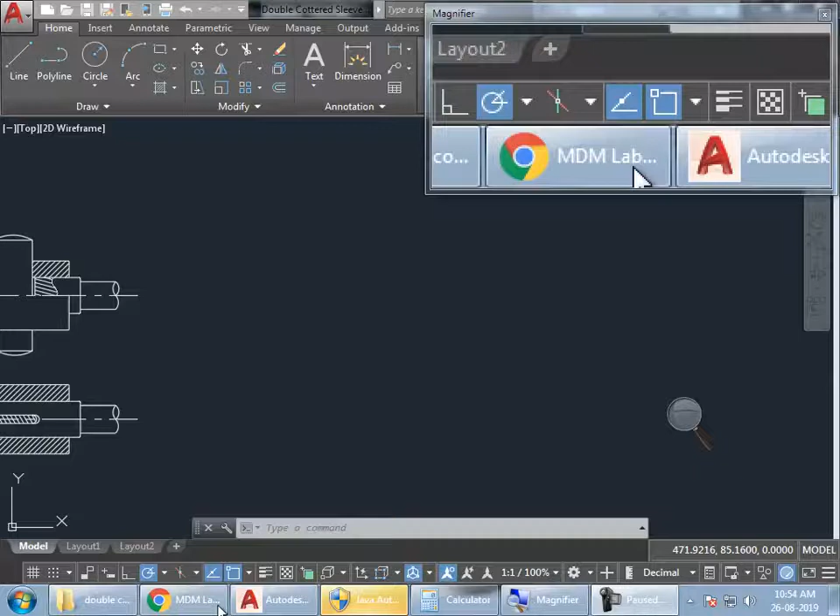Okay, now watch here. Next, everyone watch here. Stop drawing. So next we are going for cottered joint with socket and spigot. Fine. So I have placed a magnifier here. So wherever I am moving my mouse, you can see the magnified view over here.

Okay. So what is the name of this? Cottered joint with socket spigot ends. Again, all the dimensions have been given here. First thing, you have to calculate all these values. Keep it ready. Okay. You should be able to draw a rough sketch of this. Once you have the rough sketch along with all the values, we can start drawing. Fine.

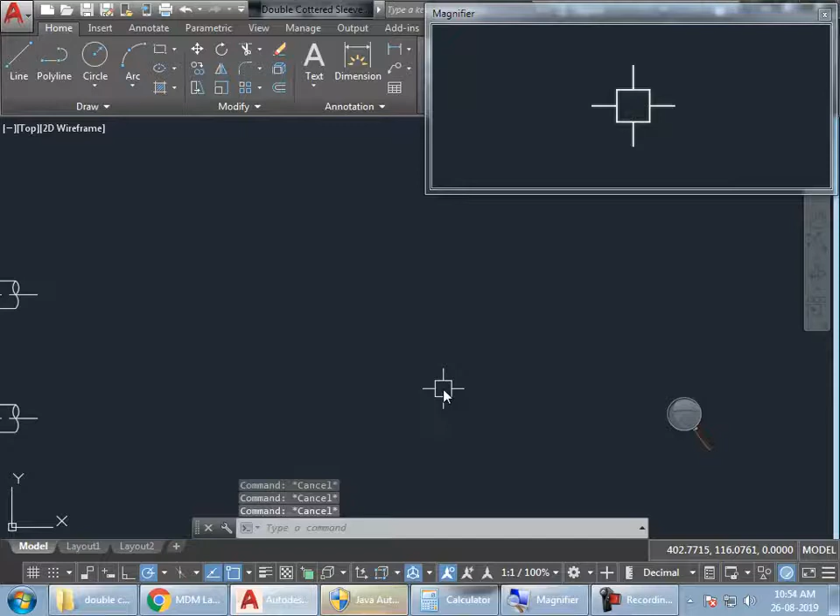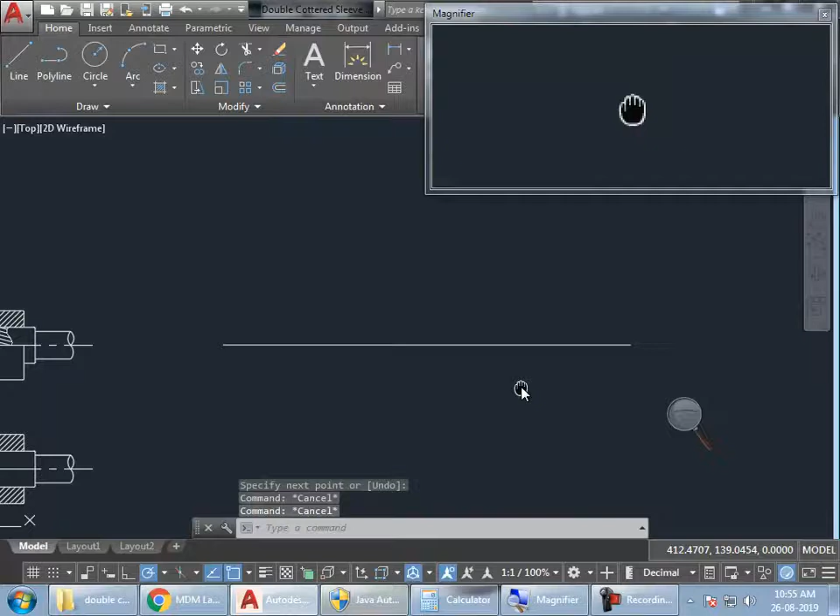So I'll first start at the center. So I have to start with the center line, right? Now, what is the diameter D? How much did I give the diameter? 16. So you can see on the whiteboard, I have told you the value of D is 16. So 16 means how much on both sides? 8 on both sides. So 8 above and 8 below. Clear?

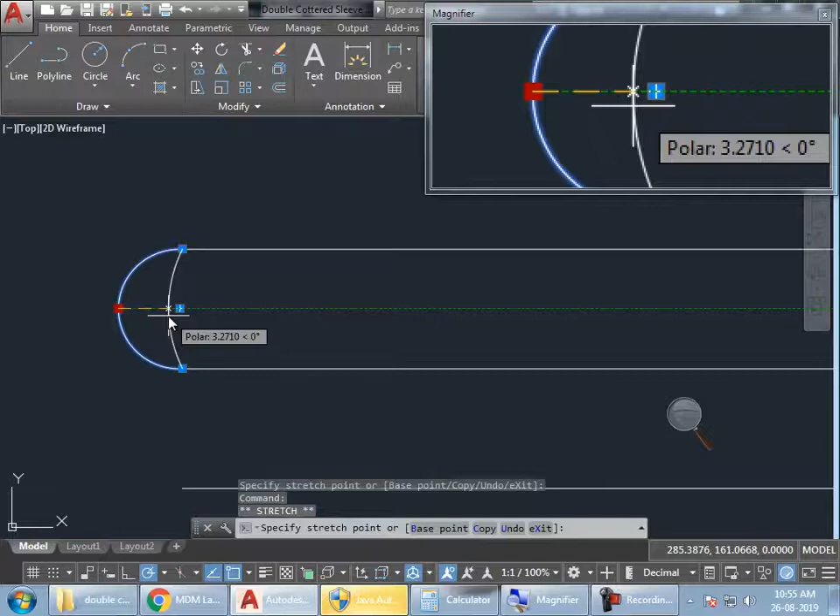Next, I have to go for this one, right? How to create this? Arc. What is the command? A, enter, and go for arc. So 3 points you can click. If it is too big or too small, you can just adjust it. Okay. After this, what to do? I can create another arc, or I can just go for mirror. So this is clear.

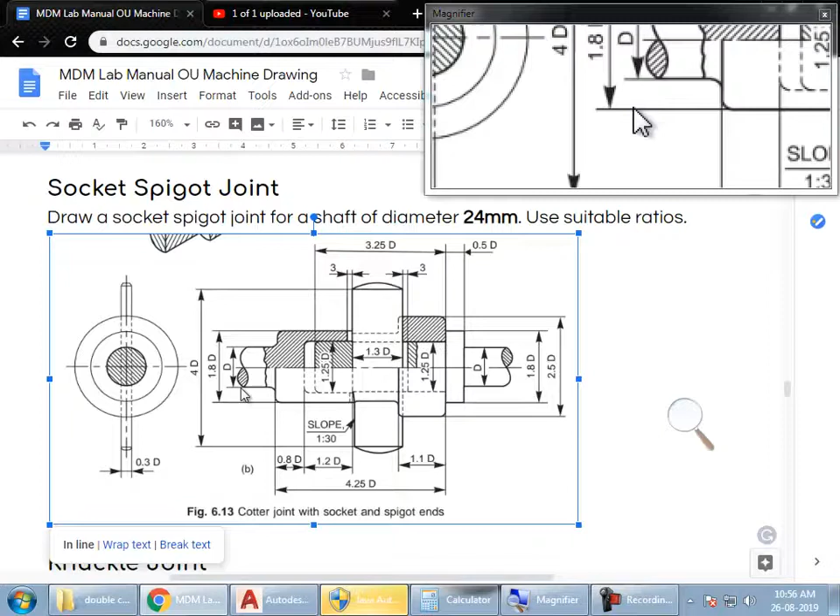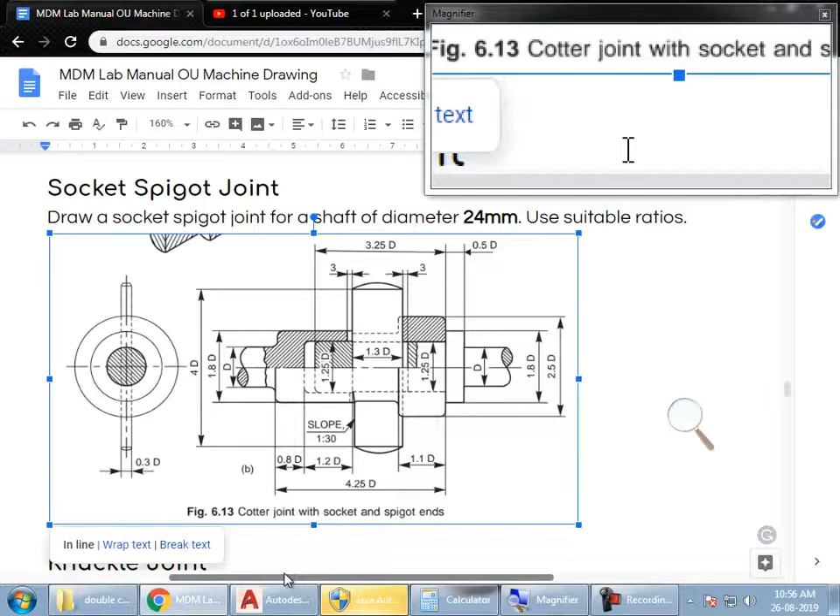After this, length we have not been given. So we can start it anywhere. So let me start here somewhere. Okay. Now, this point to this point, how much is this? 1.8 D. So 1.8 into D, 16, so we get 28.8. How much we have to take on both sides? Half on both sides. So 14.4. So go for offset 14.4 from center above and from center below.

Next, what to do? Trim. TR double enter. Trim these. Over.

Boys, listen. First listen. Can talk later.

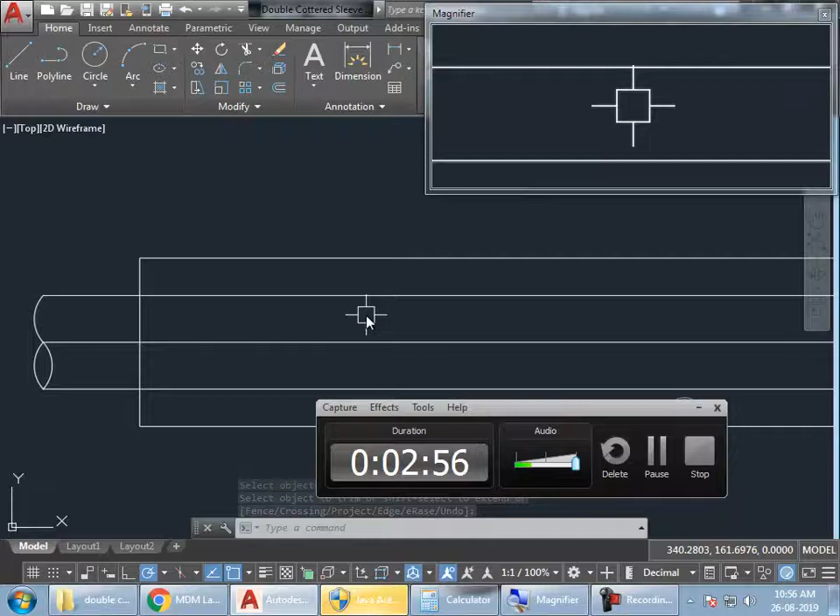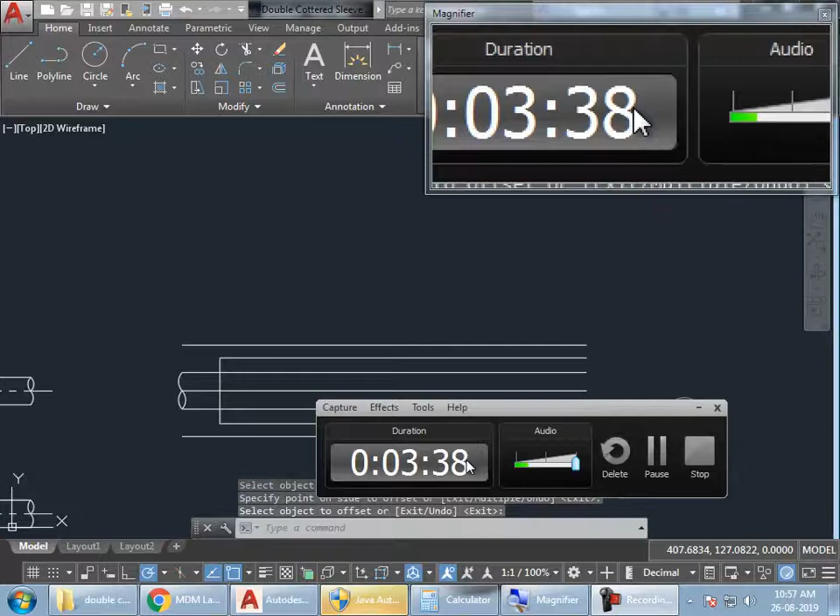Okay. So what to do next? This inner one, 1.25 D. Or else let us go for the outer one first. So what is this outer? This point to this point, 2.5 D. So 2.5 D is how much? 2.5 into 16. It's 40. So 40 means 20 on both sides, right? So offset 20 from center above and below. Right? So what's next?

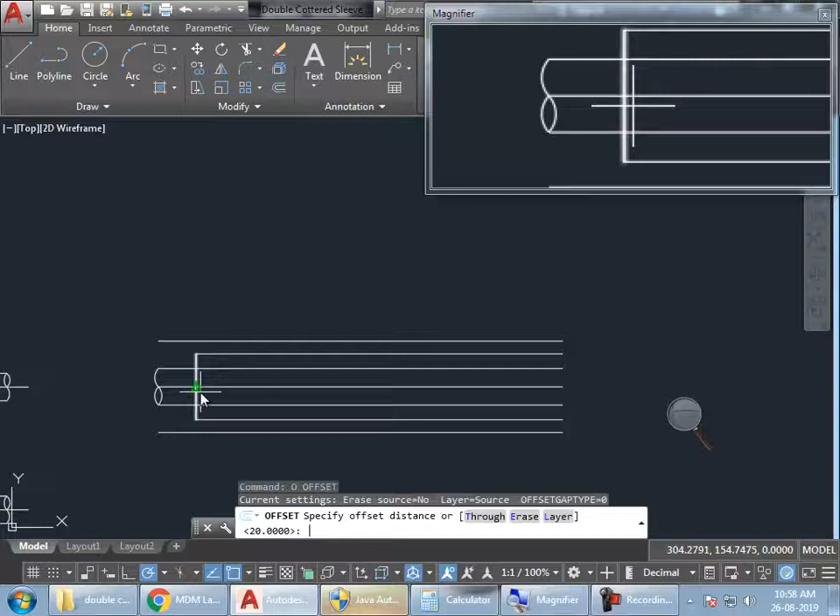Next, we need this total length. How much is the total length? 4.25 D. So 4.25 into 16. That is how much? 68. So offset 68 from this line over this side. Then what you have to do? Extend it, then trim. Okay.

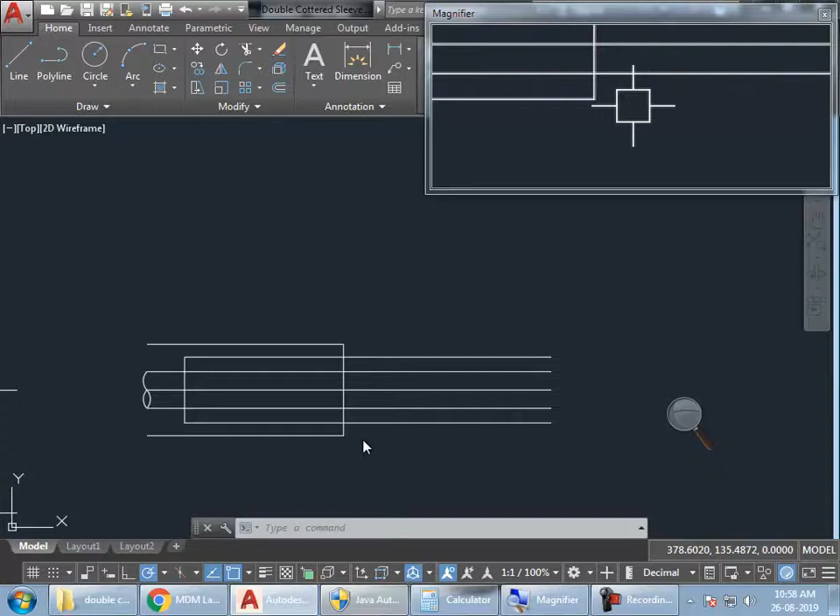And what is this thickness? How much is this thickness? 1.1 D. How much is 1.1 D? 1.1 into 16. 17.6. Go for offset 17.6 this side. Then again trim. TR double enter. You have to remove these two. Correct? So this we got it.

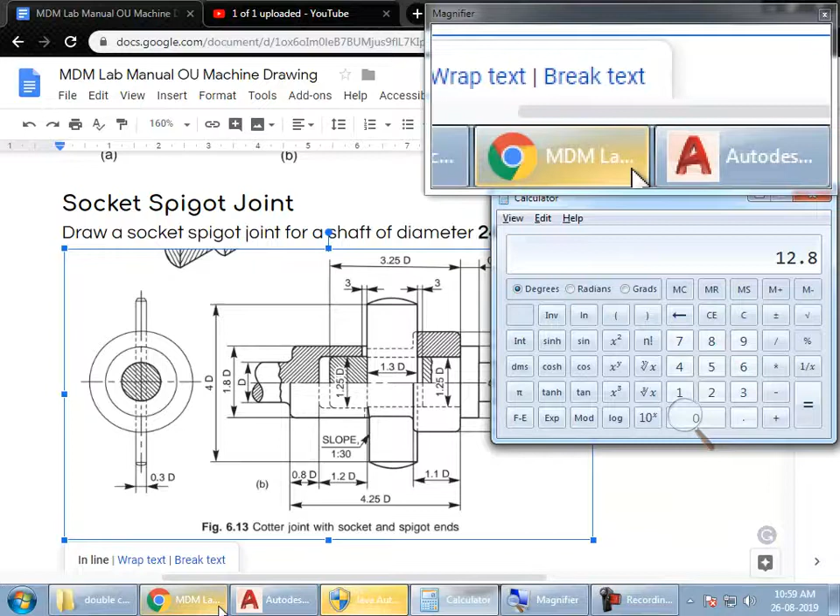Next, this one. How much is this? 0.8 D. So 0.8 into 16. What do we get? 12.8. So from this line, 12.8 this side. Clear? So this line we got it.

Now for this line we need this diameter. How much is this diameter? This point to this point. 1.25 D. Okay? So 1.25 into D, 16. That is how much? 20. So half, 10 on both sides, right? So take offset 10, 10 above, 10 below.

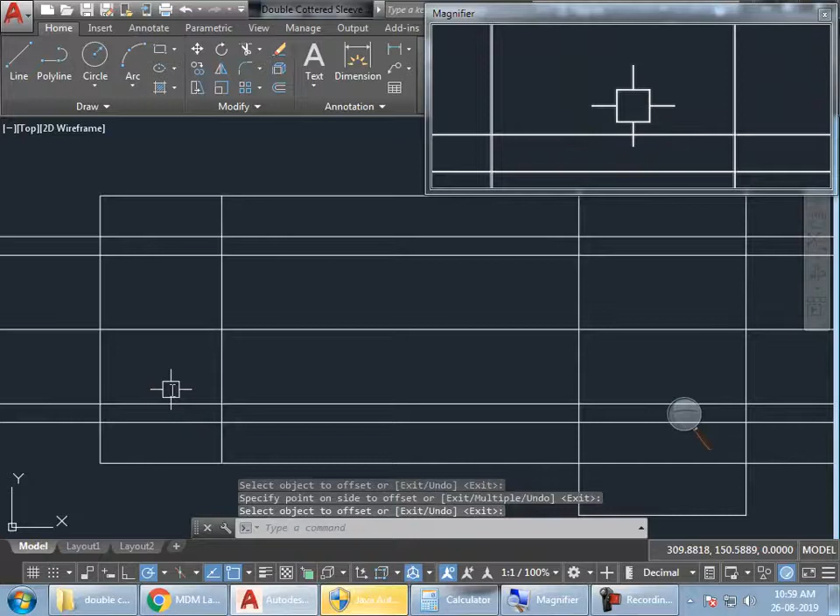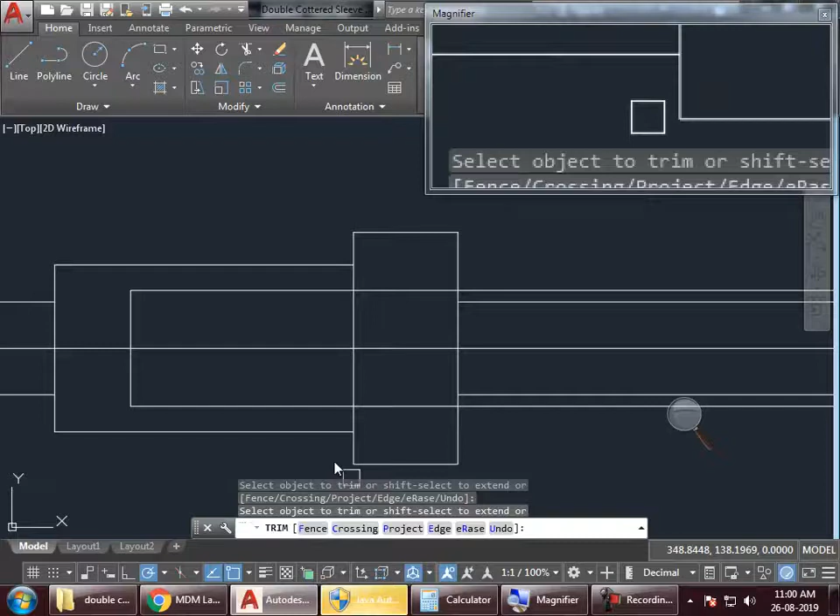So next what you have to do? Trim. So trim this. This also we don't want it, right? And these inner lines also we don't want it. Remove the inner lines, right? These lines also we don't want it. Remove it. Okay. So we need this up to here, right? That's enough.

Right? So we got it here. Now what is this thickness? 0.5D. 0.5D is how much? 8. So 8 mm offset this side.

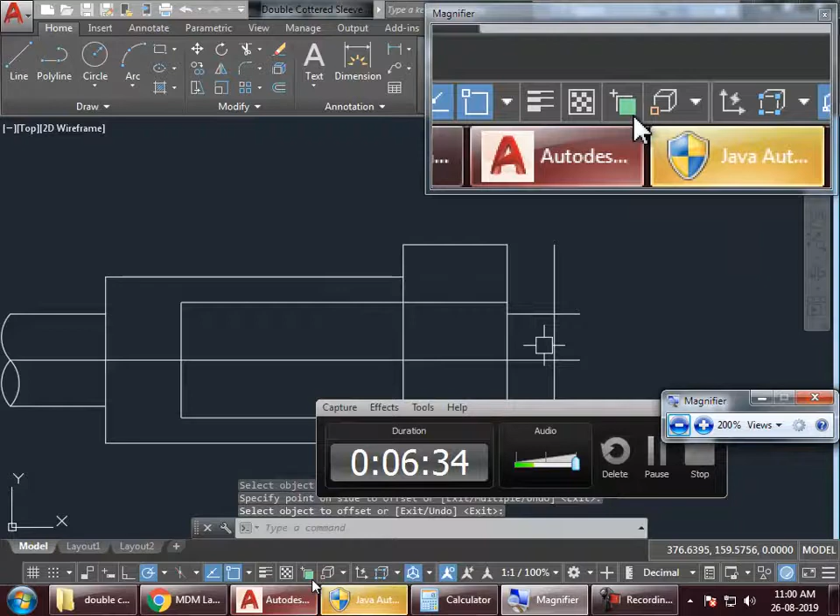And again, what is the thickness here? This point to this point? 1.8D. So go for 1.8D. 1.8 into 16, 28.8. So half, 14.4. So again, here I have to take offset 14.4. So 14.4 above and below.

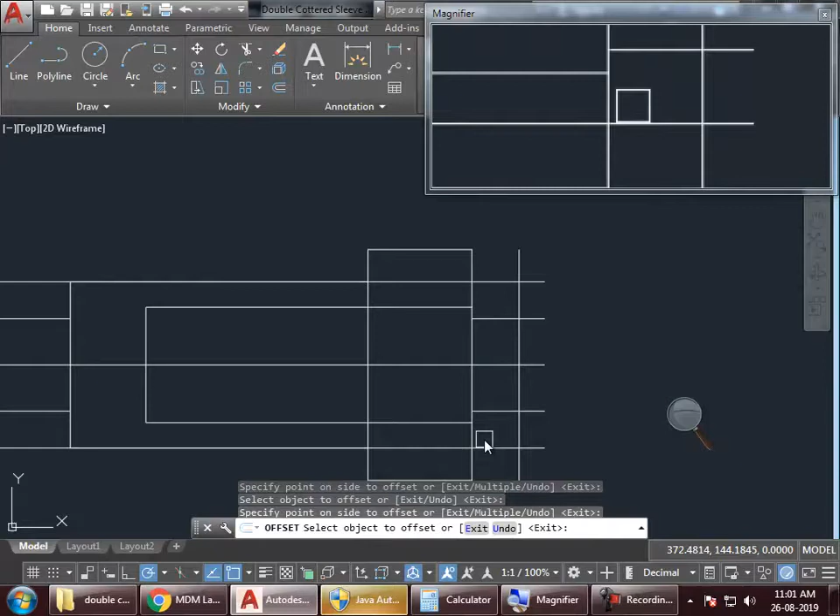So this, I want it only here, right? I have to trim this off. This again I have to trim it off. This again I have to trim it off. Fine. Clear? So this we got it. Anything else?

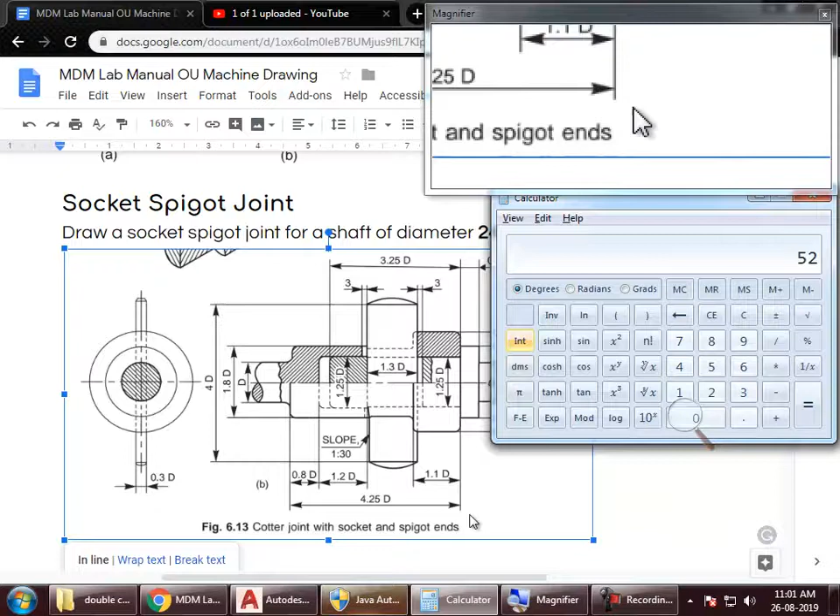Now from this point to this point, how much is this? 3.25D. So 3.25 into 16. What do we get? 52. So offset from which line? From this line, na? Offset how much? 52. This side. Again, we want it only up to these lines. So trim it off.

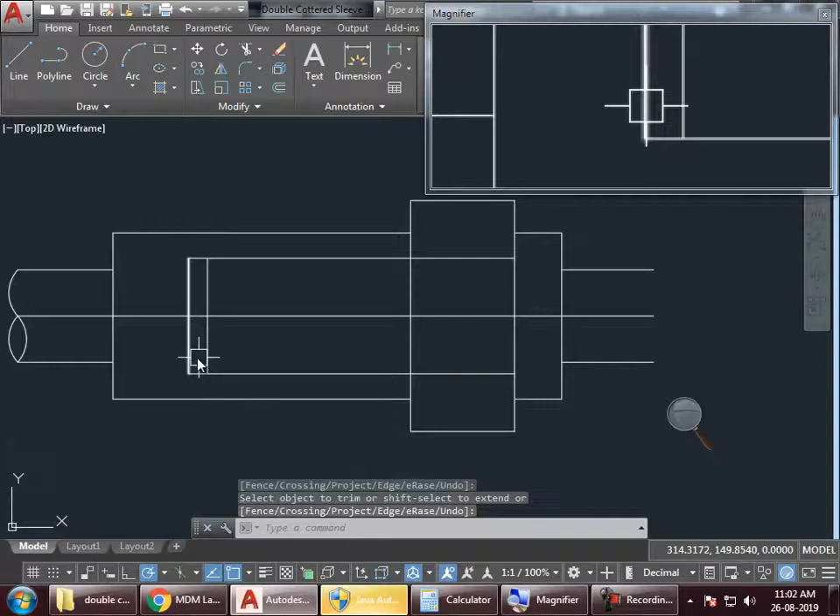So this what we are getting here is called clearance, the distance between these two. Okay? Then what to do next? This line we got it. Next we have to go for cotter. So where is the cotter starting? Cotter width is 1.3D. And this is starting a little before this point, right? So 1.1D. Okay, or else we can take it from this side.

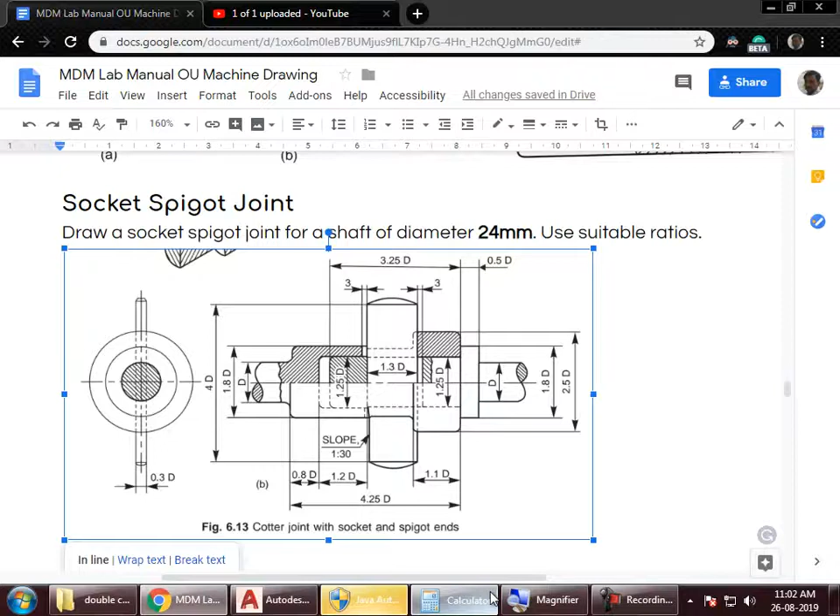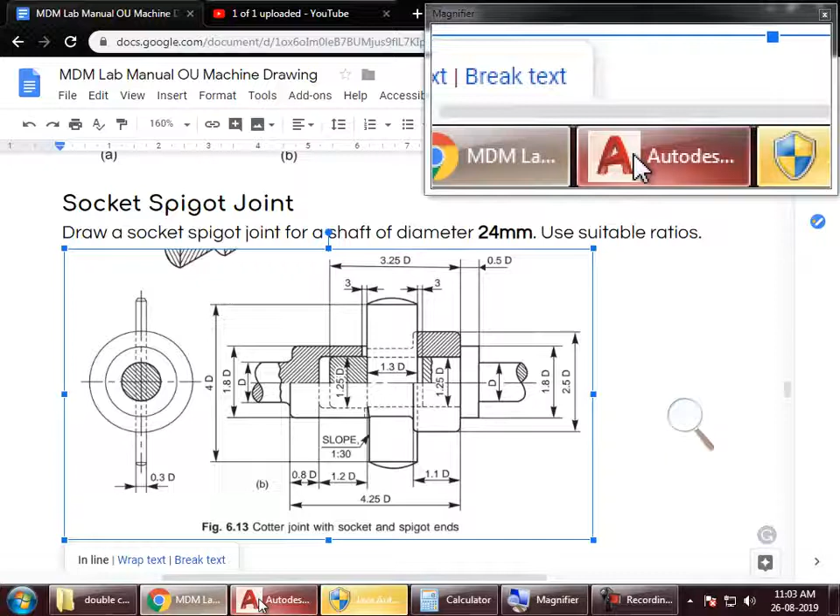So from this side, what is this gap? 1.2D. 1.2D is 1.2 into 16. What do we get? 19.2. So from this side I have to take it, not from this side. So from this side, how much offset? 19.2 inside. So this is where the cotter will start.

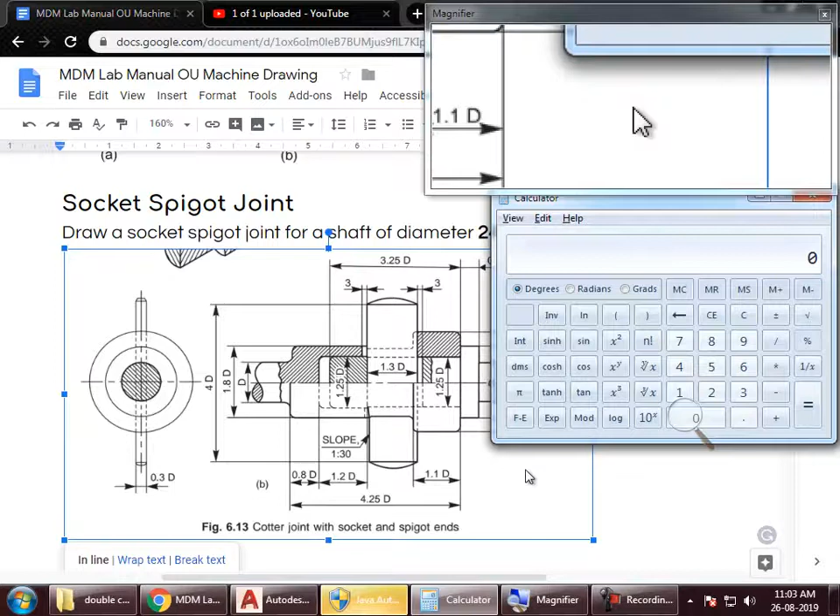So from this, what is the width of cotter? 1.3D. So 1.3D is how much? 20.8. So I have to go for offset 20.8 from this inside. So it is slightly crossing it, right? So we want it here only.

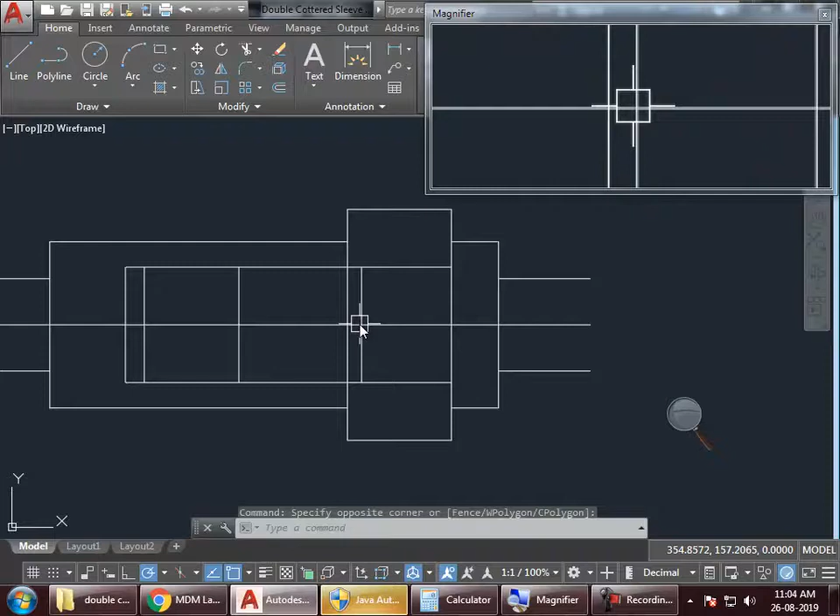Next, what is the height of cotter? Height of cotter from top to bottom, 4D. Okay? So some of the dimensions are repeating. Cotter height is same in previous case as well as this case, right? So 4D is how much? 4 into 16 is 64. Half of 64 is 32. So offset I have to take 32. So from center, 32 above, 32 below.

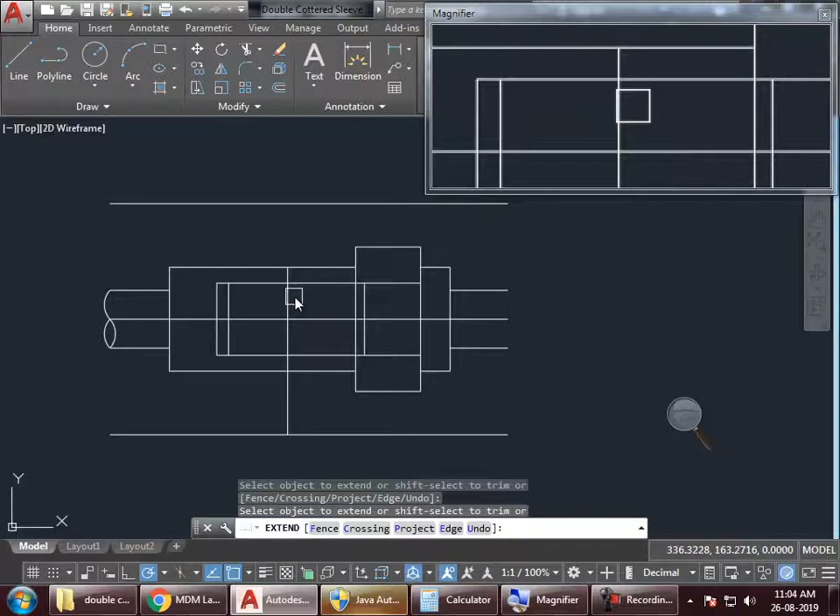Okay. Next, what I should do? Extend. EX double enter. Extend these lines and these lines. Correct? And then press shift, delete this. Done. Once again I have to go for taper, slope. How much is the slope? 1:30.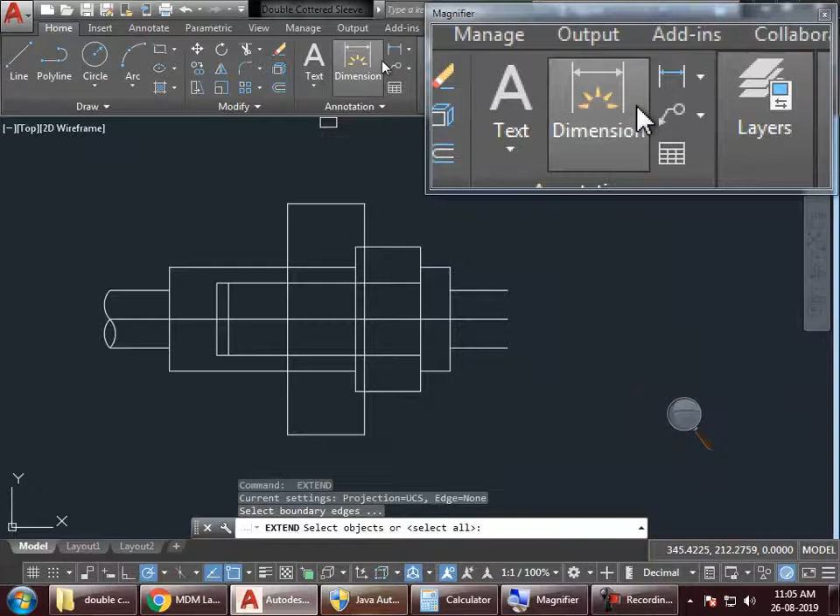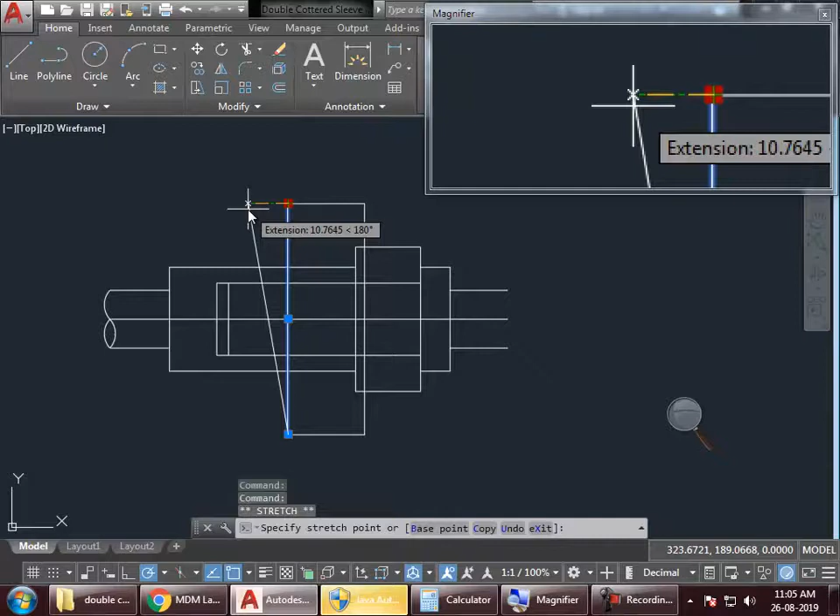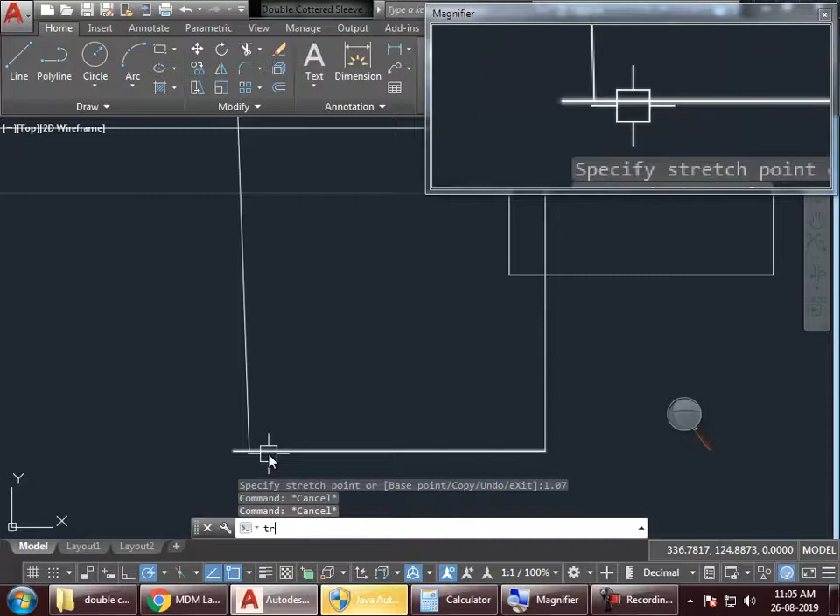What is the height we got? 64. That means half is 32, right? For 30 it is 1 mm. For 32 how much? So 32 by 30, 1.066, we can round it off to 1.07. So upper side we have to take 1.07 more and below 1.07 less. So taper we applied. So now go for trimming this off and extend this.

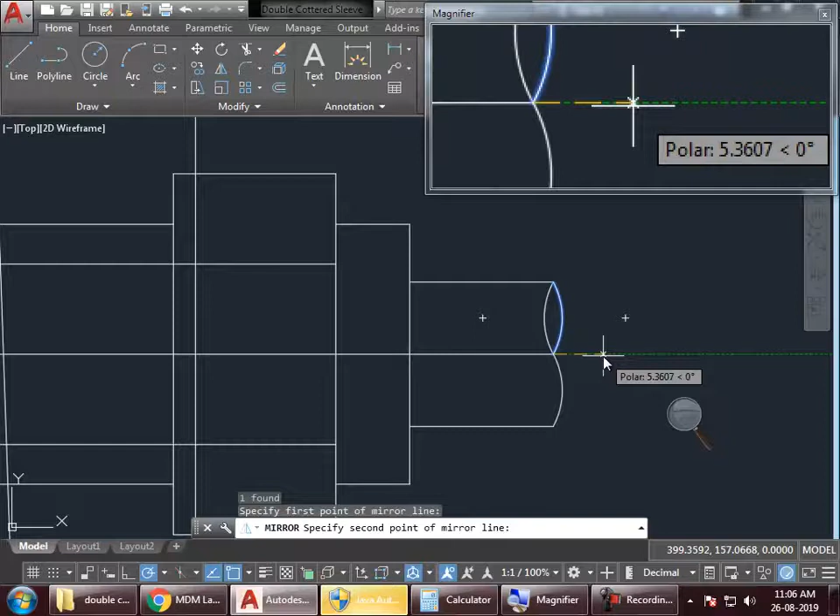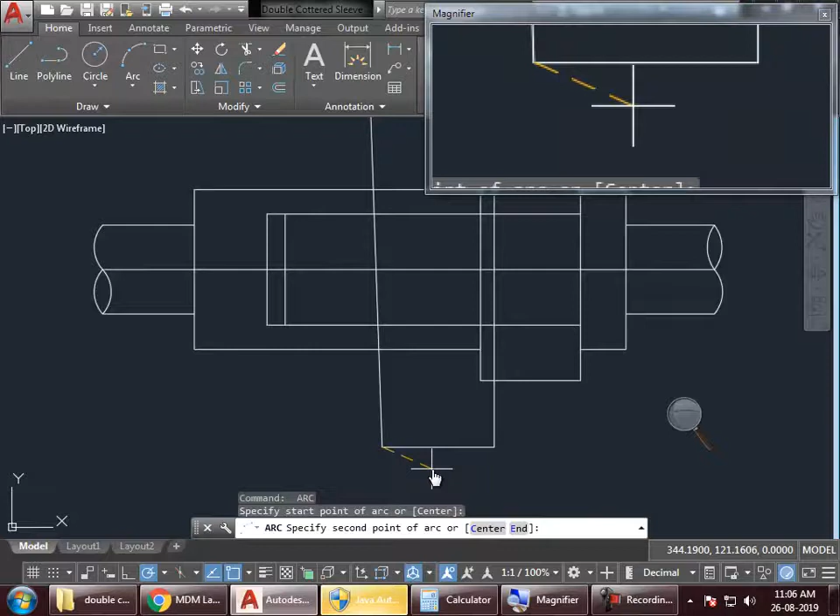Okay. So now most of it is ready, except this. You just have to create this. Then mirror it. So if it is very, very thin, you can increase it slightly. Okay, good enough? Next you have to draw another arc over here and at the bottom. So all the dimensions we have made use of them. Is any dimension missing still?

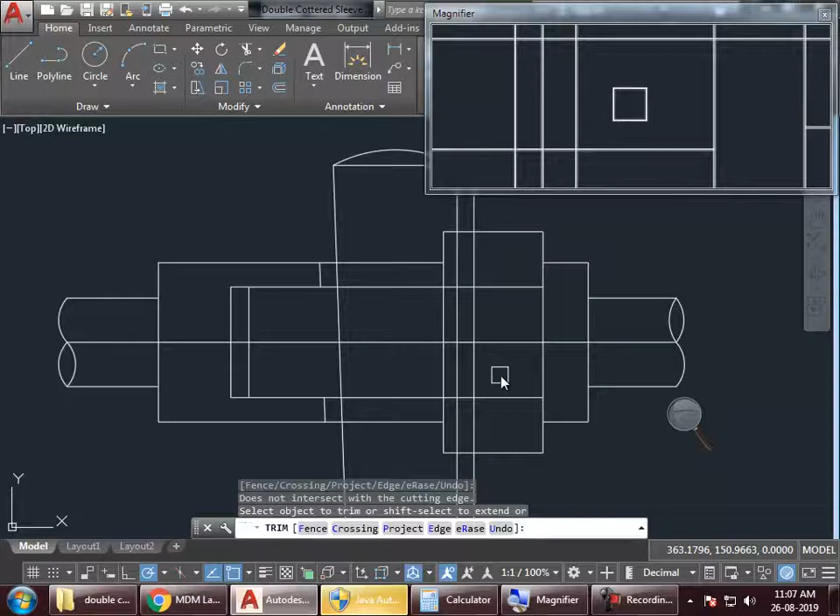Okay, this 3 mm and 3 mm. What is this 3 mm? Clearance. So this 3 mm we have to use it. So go for 3 mm offset this side as well as this side. Now trim these parts here. This side should be in touch. This we should retain. Whereas coming on this side, we should retain the inner edge.

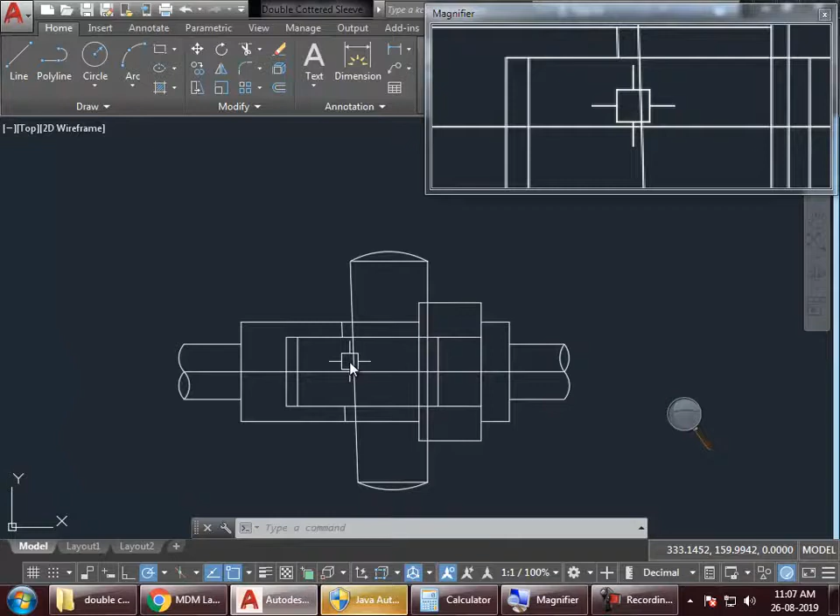So now we have used all the dimensions, right? Yes. So now we have to go for the hatching and all. So for hatching we have to show the broken sectional view. So for broken sectional view, I have to start the broken section over here. So go for spline, SPL.

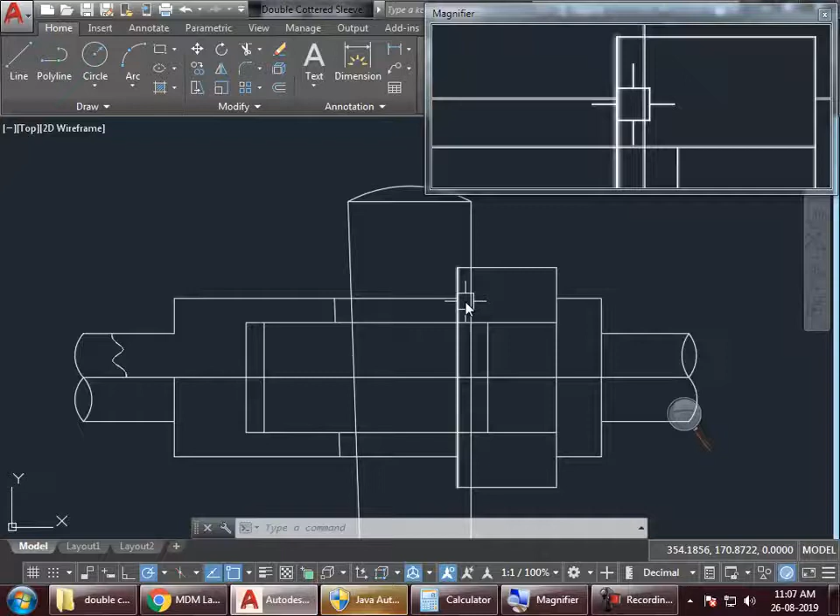Okay. Then trim this off. Trim this off. So up to this point, we are showing the hatching, right? This complete part we are showing in hatching only. So that's it. So the top part is ready. Is the top part ready? These lines we have to remove. These lines. Okay. Because the cotter is coming in front, so these parts will not be visible to us.

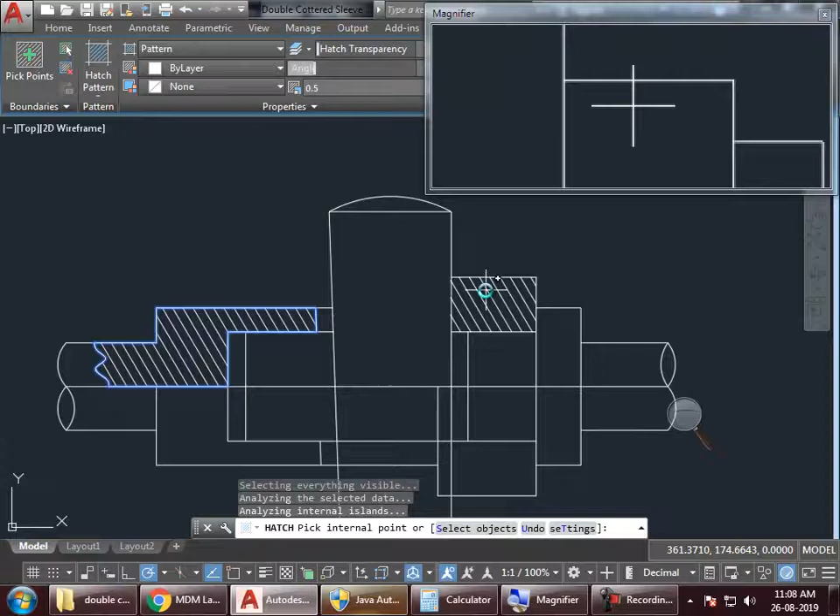Okay. Now go for hatch. This part, they are the same. Clear? Then this side and this side. Here there is a broken view. So again I need a spline. Spline. I can just draw a spline here. Trim this off.

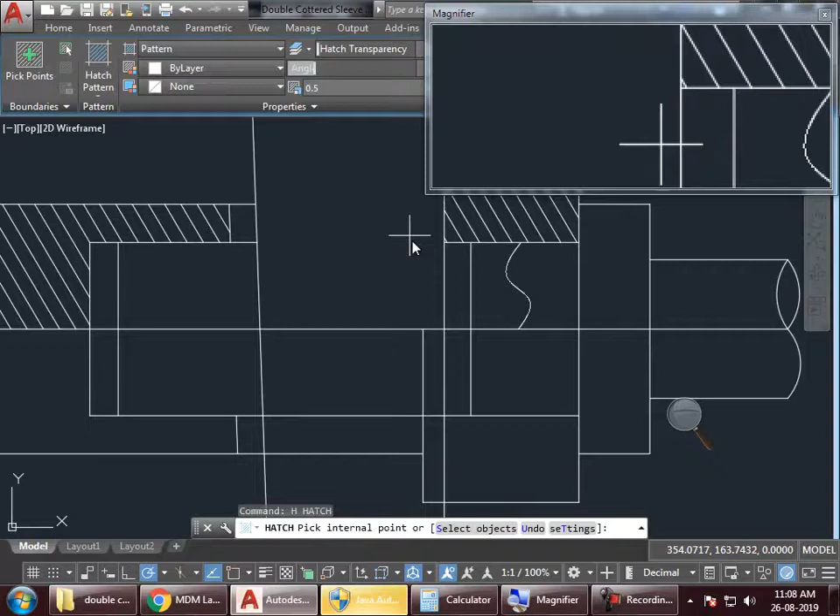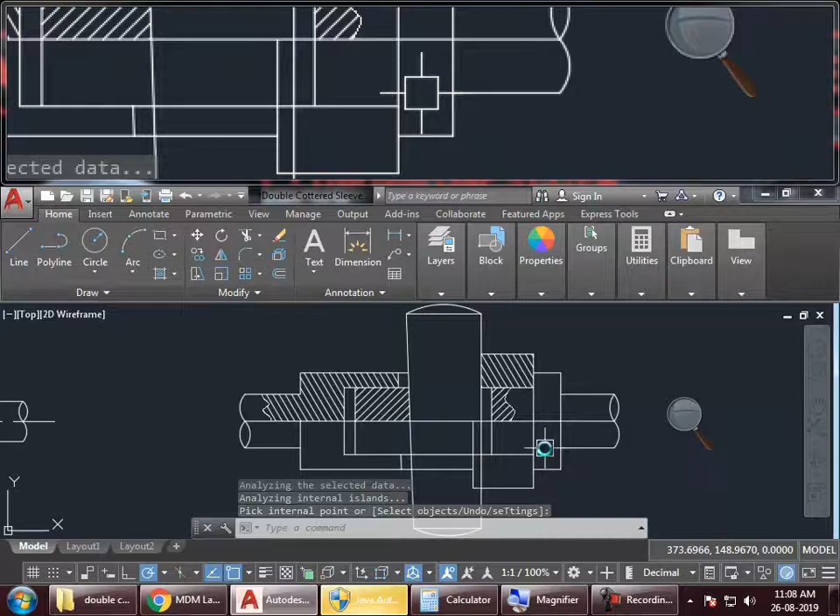Again go for hatch. But this time what do we need? Angle we need different, right? Angle how much we should take? 0. Let's go for angle 0. This side and this side. Taken? So this is the broken sectional view.

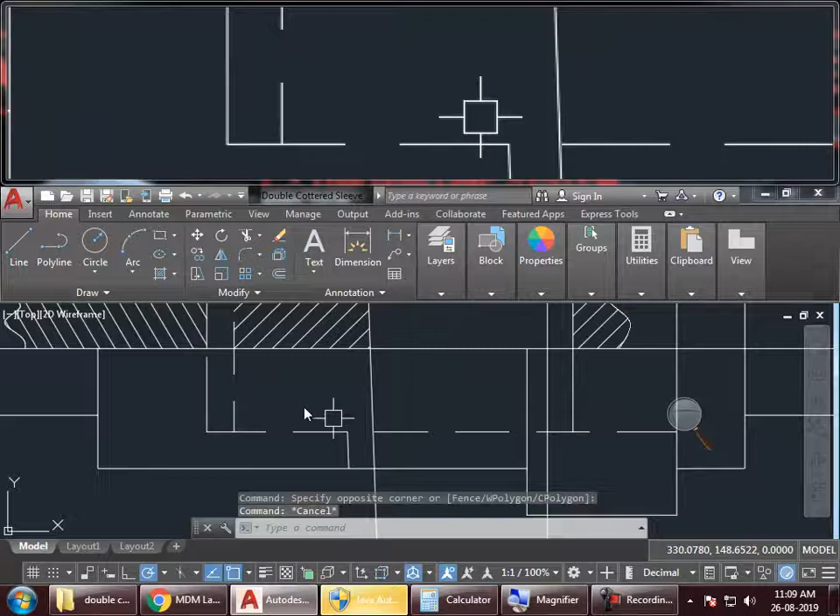Then when you see the bottom part, I want this line separate, so I'll just break a little, and all these lines will go hidden, right? All these lines will go hidden. So we have already created the layer, so shift them to hidden, right? And here, break this part a little. This line will again go to hidden.

So go to layer, change the layer to, even this line here up to the center, this line will also go to hidden layer.

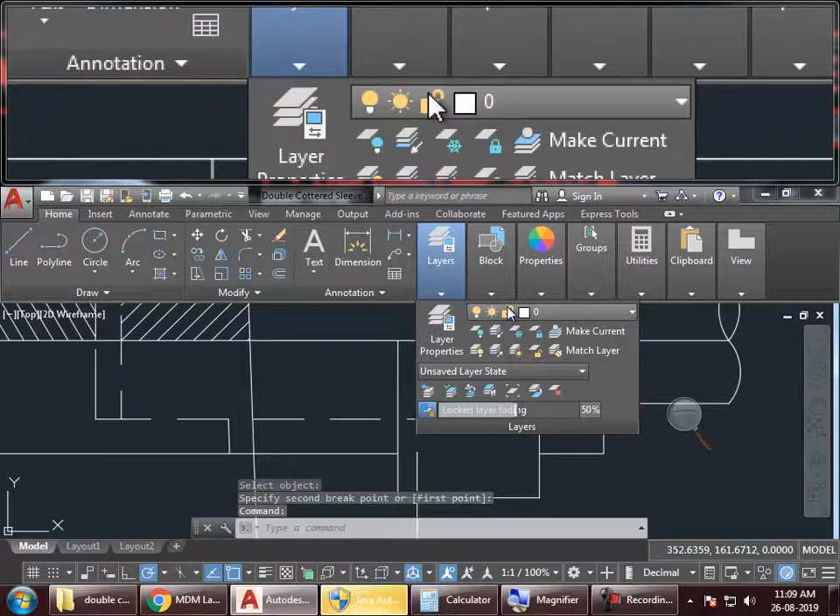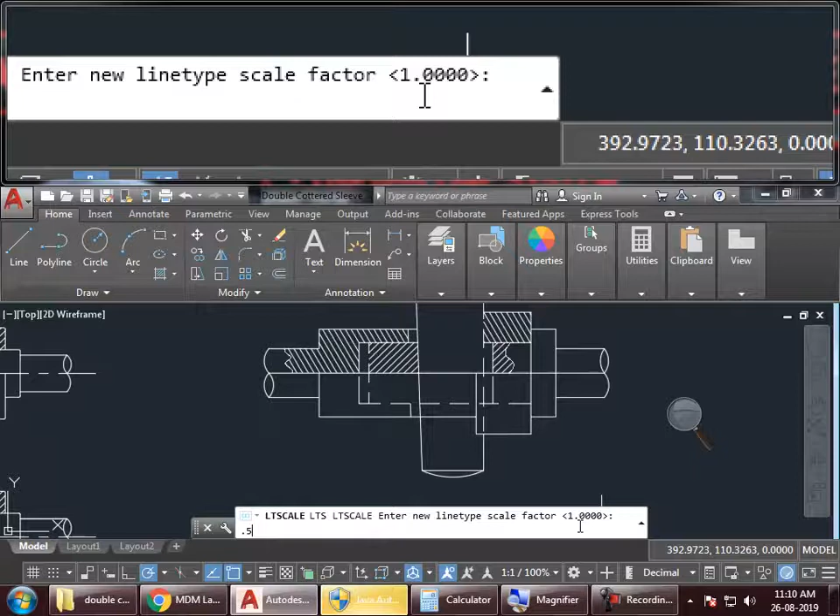Okay? If the line gap is appearing too large, you can change line type scale. LTS. Right now, what is the value of LTS? 1. So you just make it 0.5. So now you can see the width has changed. The line is appearing smaller, right? So that's how you do it.

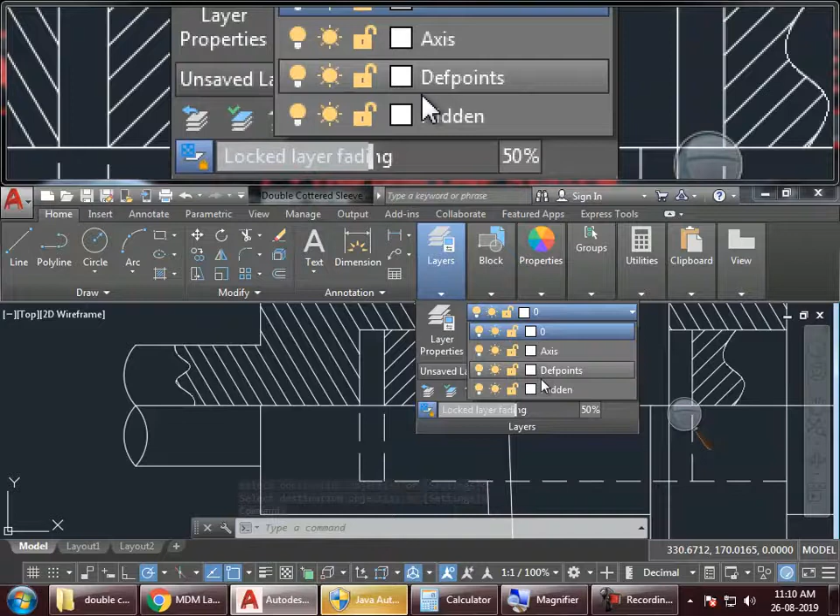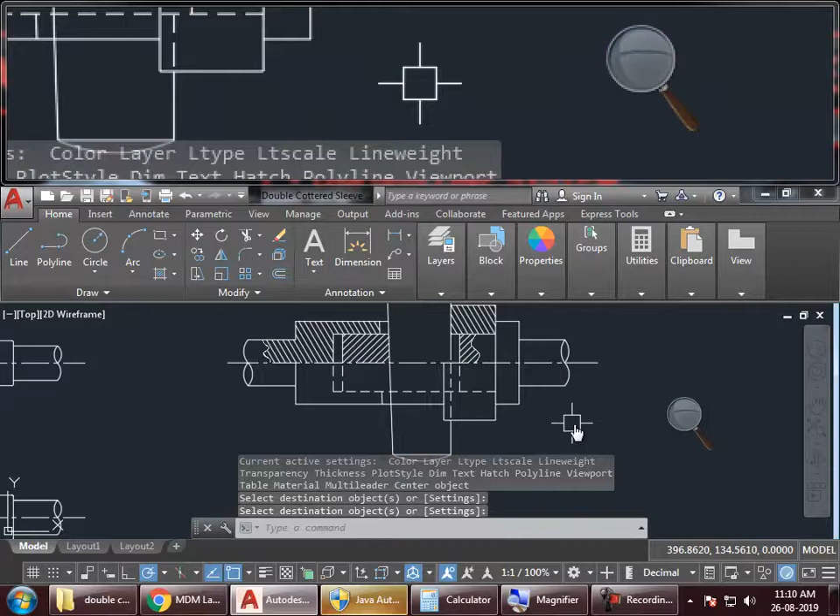And this is the center line. Center line, where we should move it? Center line we should move it to axis. After moving to axis, slightly enlarge it on both sides. Right? So this part here, this is also hidden. This is also hidden. If this is not hidden, this one will. Okay. So is the front view clear?

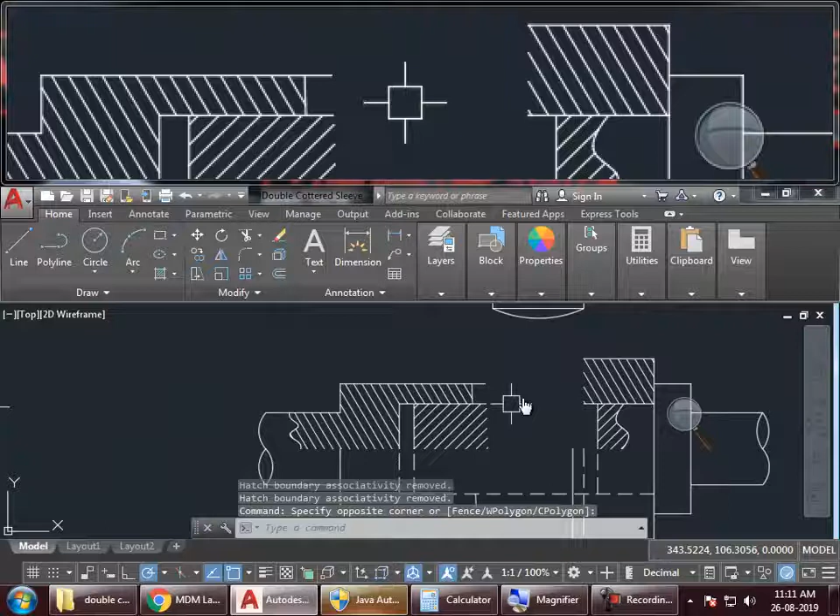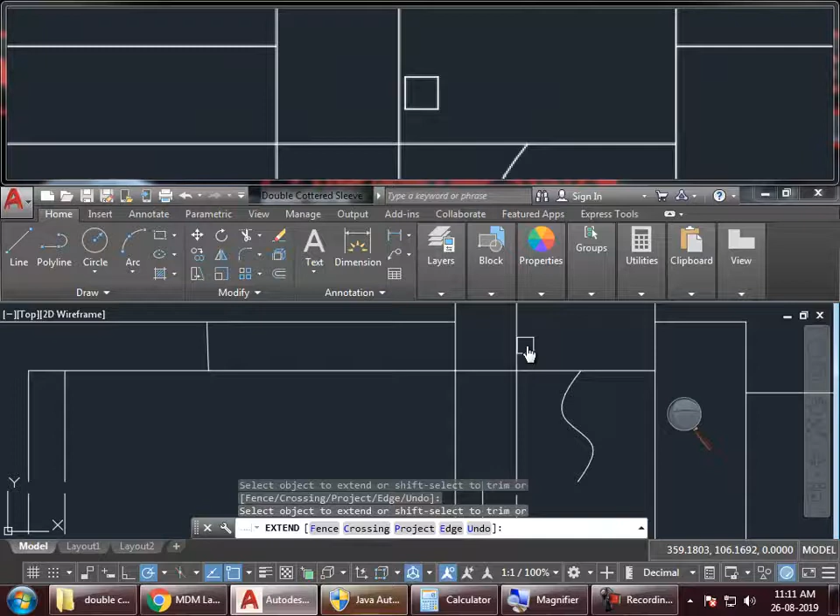Clear? Now we have to go for top view. So top view, again I can copy this straight away. Copy this part straight away. And these upper parts, I can delete them off. And delete this away. And yeah, I can create this back. Extend this totally. Extend all these. And all these splines, we don't need. We will need the center line, of course. So copy this.

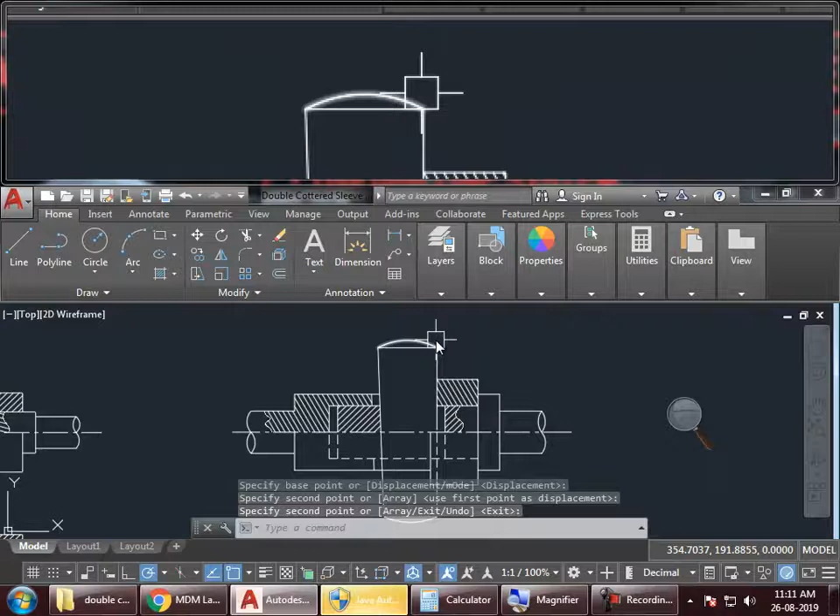Okay. So now top view. What do we need to do now? Top view, we need to take a line from here. Take a line from here. Okay. Take a line from here. This line won't be there. And we need a line from this point. Straight. And a line from this point.

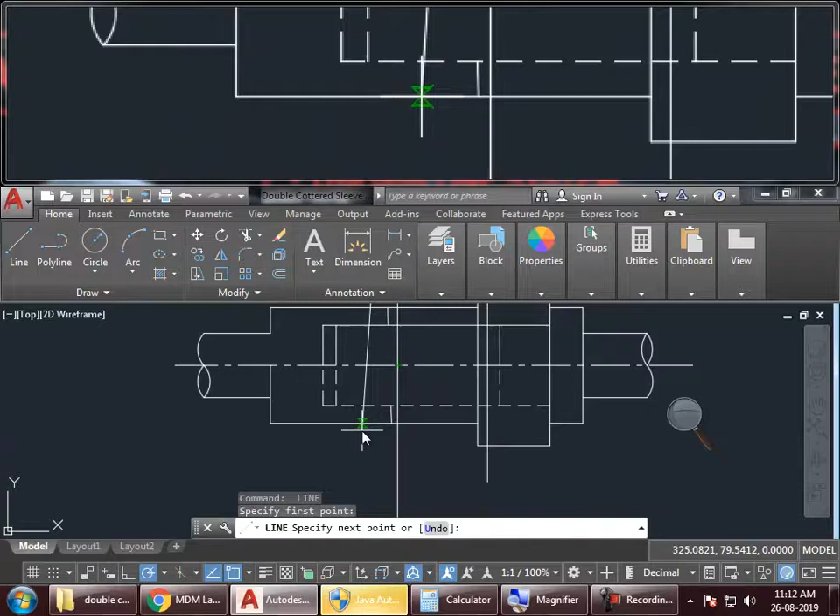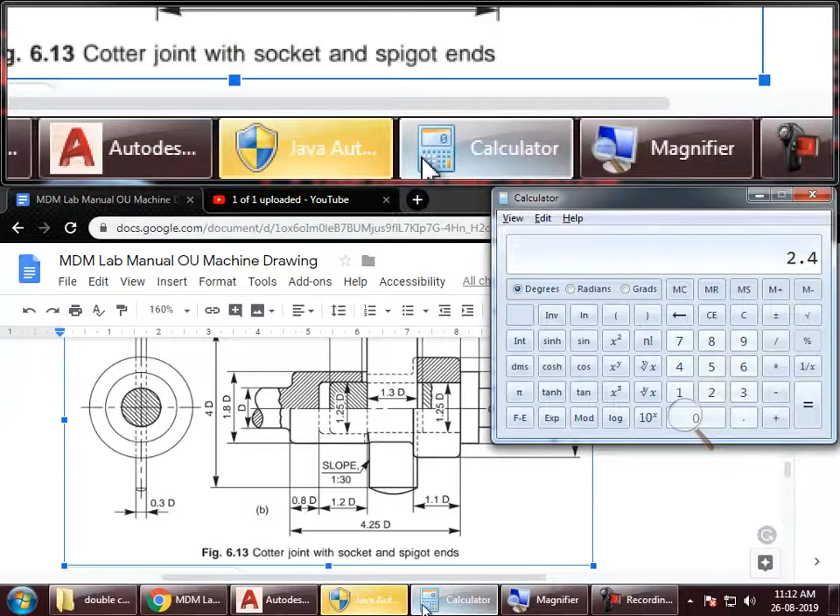Okay. So once again go back. Check out what is the width of this. It's given at this side. 0.3D. So how much is 0.3D? 0.3 into 16, 4.8. So half of that is how much? 2.4. So again I have to take offset 2.4 above and below.

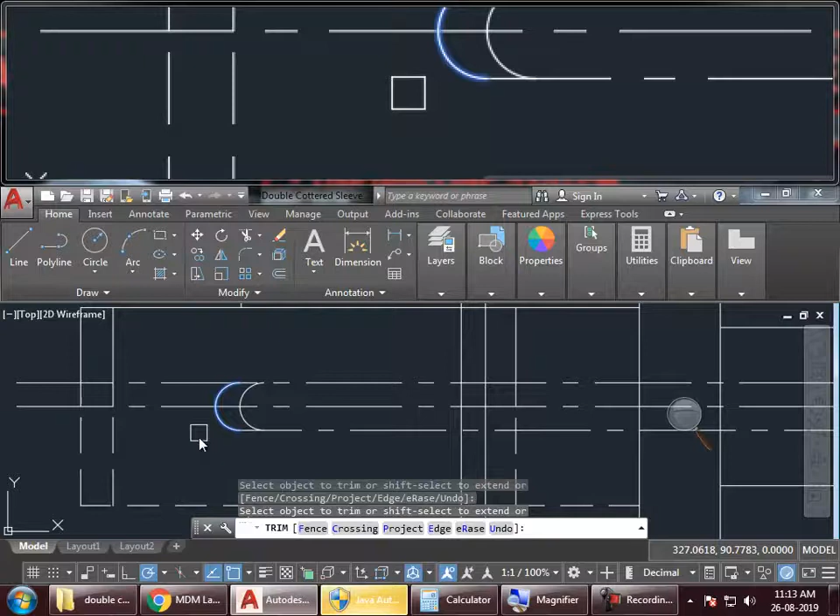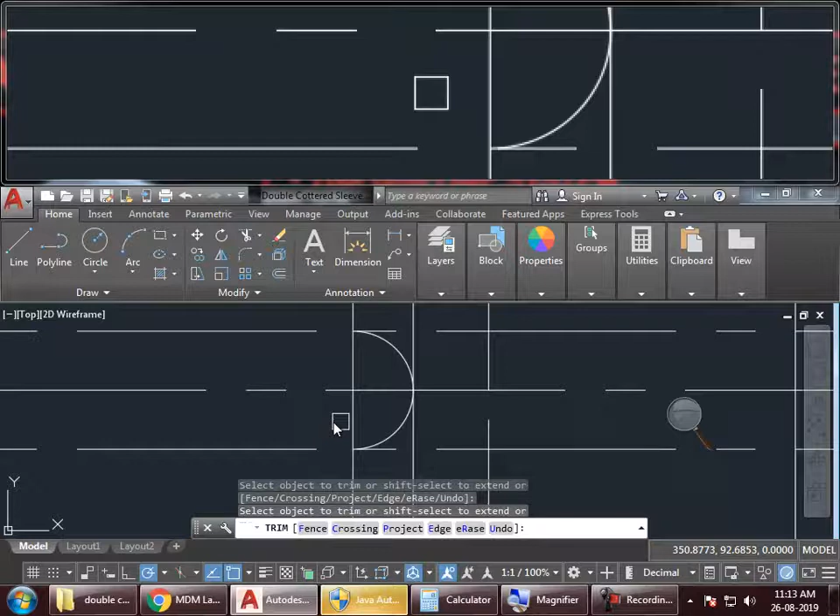Next I need to draw a circle here and I need to trim it. Trim this. Copy that circle. This point also. These lines, the work is over. And trim this. Trim these lines off. Then this side we need up to here, right? I need to take it. Okay. All these lines. Clear? To this.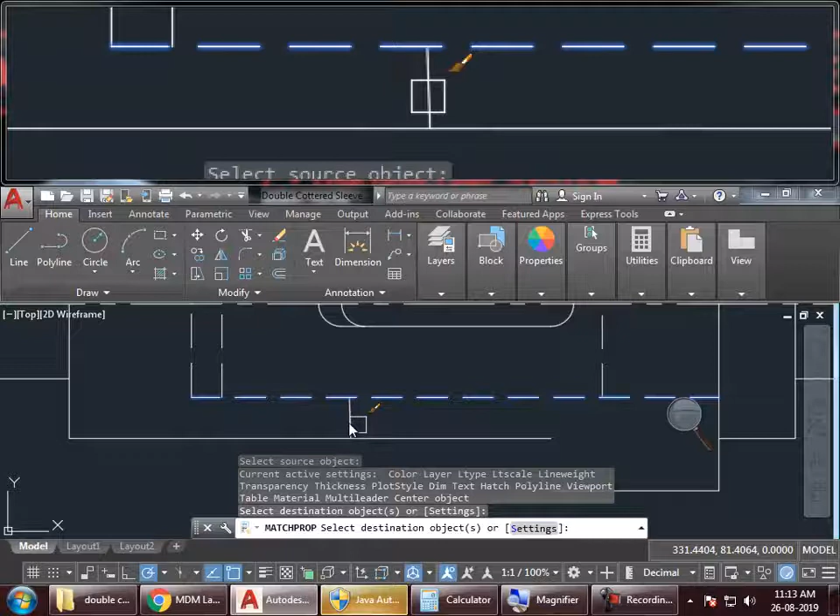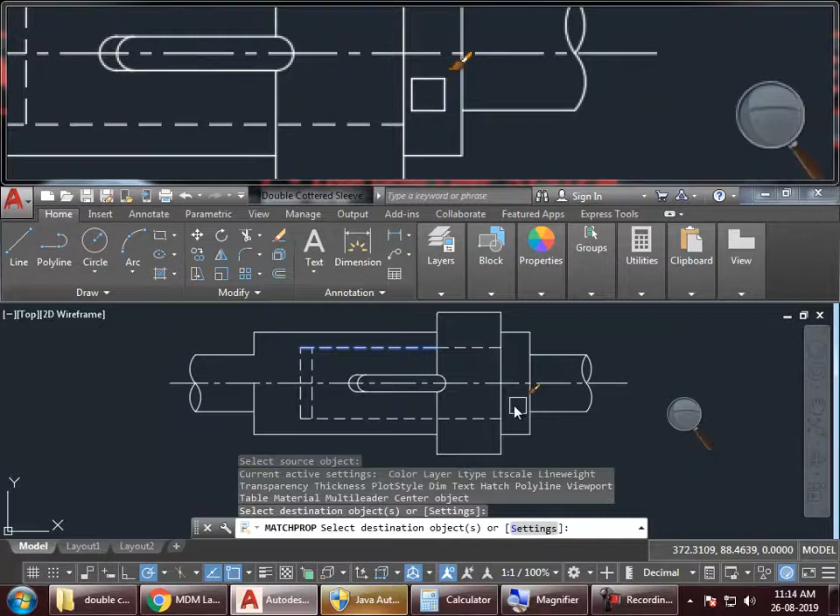Then again, all these are solid visible edges. All these lines, they will become hidden. This line won't be there, neither will this line be there. This line will go. These lines won't be there, so I think that's it. This line will also become hidden. This. Okay, so this is the top view completed.

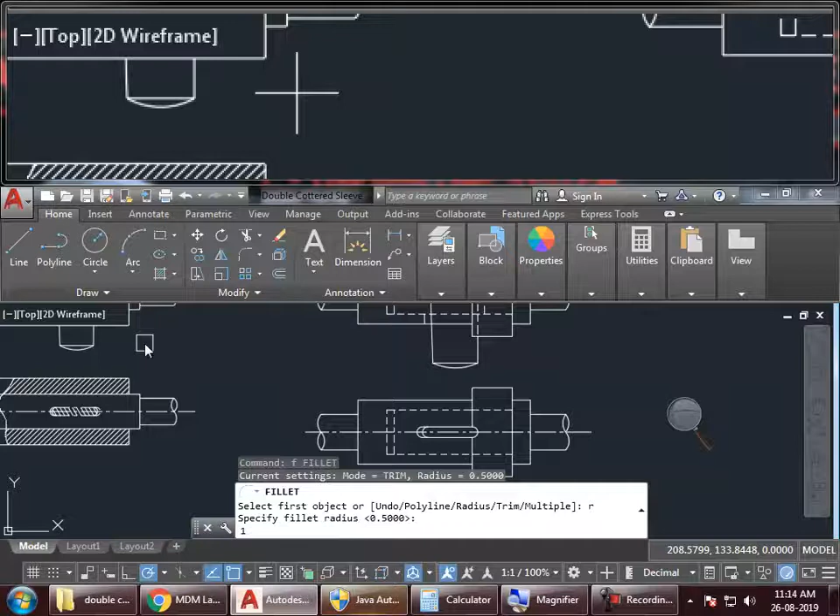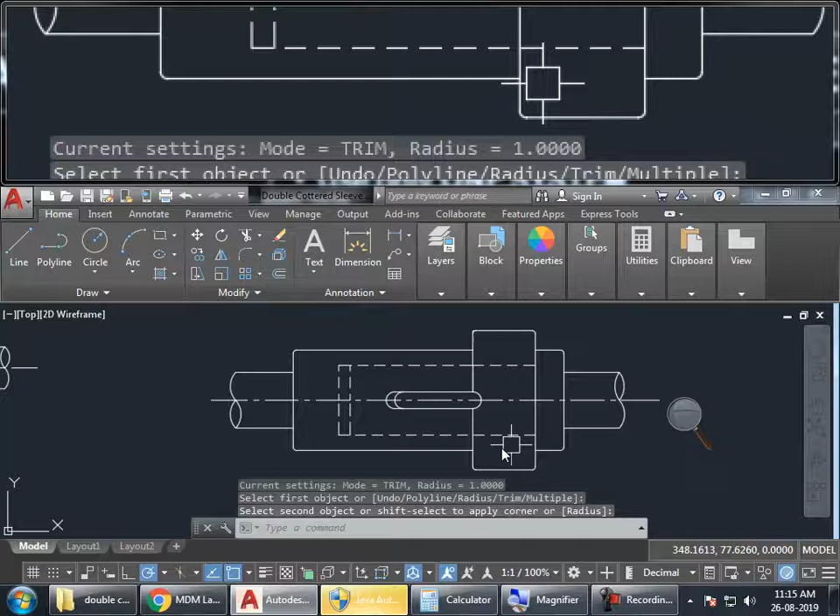Is it clear? If you want fillets, you can apply fillet. Radius you can give 1 mm. Wherever you feel round edges are needed, you can go for fillets. Okay, slight fillet. So 1 mm fillets I have taken at all the corner points, and that is how you draw it.